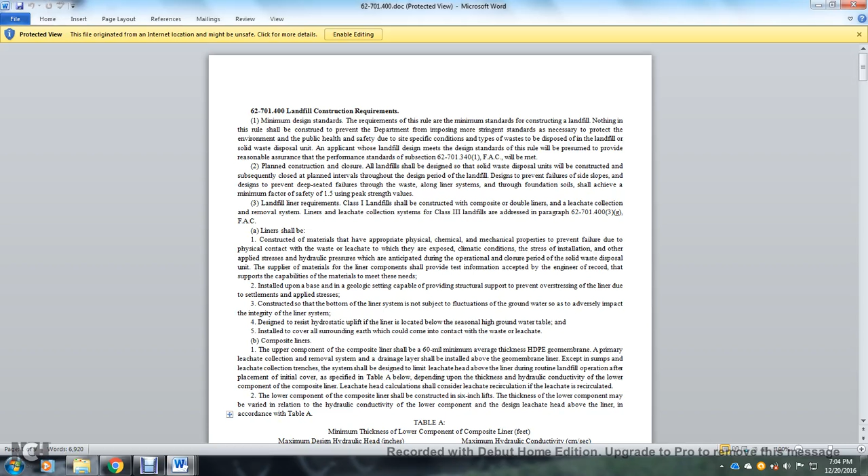Alright, 62701-400, landfill construction requirements.

Minimum design standards: the requirements of the rules are minimum standards for the construction of landfills. Nothing in the rules is construed to prevent the department from imposing more stringent standards necessary to protect the environment, public health, and safety due to specific conditions, the type of waste to be disposed of in the landfill, and the solid waste disposal unit application with the landfill design.

Meeting the design standard within the rule is presumed to provide reasonable assurance of meeting the performance standard of subsection 62-701.340(1), F.A.C., will be met.

The planned construction and closure of the landfill should be designed for the solid waste disposal unit, with construction and subsequent closure at planned intervals throughout the design period of the landfill.

The design must prevent failure of the side slope and prevent deep-seated failure through the waste, along with the liner system and the foundation soil, which shall achieve a minimum factor of safety of 1.5 using the peak strength.

Landfill liner requirements: Class 1 landfills should be constructed with a composite or double liner with a leachate collection and removal system. Liner and leachate collection system requirements for Class 3 landfills are addressed in paragraph 62-701.400(3)(g) of the Florida Administrative Code.

Liners shall be constructed of materials that have the appropriate physical, chemical, and mechanical properties to prevent failure due to physical contact with the waste, the leachate to which they are exposed, climatic conditions, and stress installation, along with applied stress and hydraulic pressure anticipated during the operational and closure period of the solid waste disposal unit.

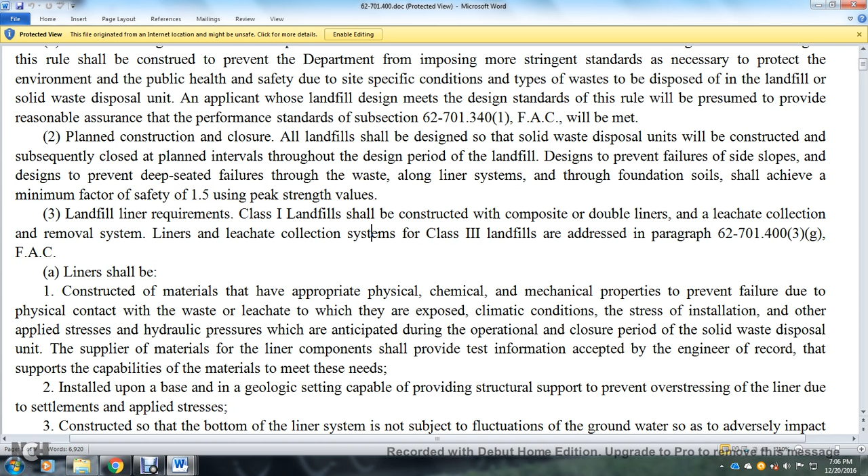The supplier of liner component materials shall provide test information accepted by the engineer of record to support the capability of the materials to meet the standards, and to install with the base in the geological setting the capability of providing structural support and preventing overstressing of the liner due to settlement and applied stress, constructed so that the bottom of the liner system is not subject to fluctuation with the groundwater so that it adversely impacts the integrity of the liner system.

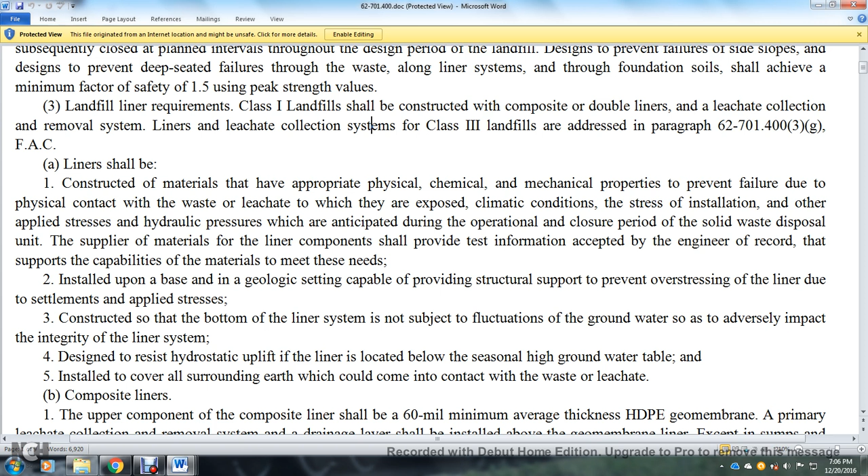Accounting for design hydrostatic uplift, the liner located below the seasonal high groundwater table shall be installed with cover over the surrounding area of earth which could come in contact with the waste or leachate. The upper component of the composite liner shall be a 60-mil minimum average thickness HDPE geomembrane.

The primary leachate collection and removal system drainage layer shall be installed above the geomembrane liner, except for sumps and leachate collection trenches. The system shall be designed to limit the leachate head above the liner during routine landfill operations, with placement of the initial cover as specified in Table A below.

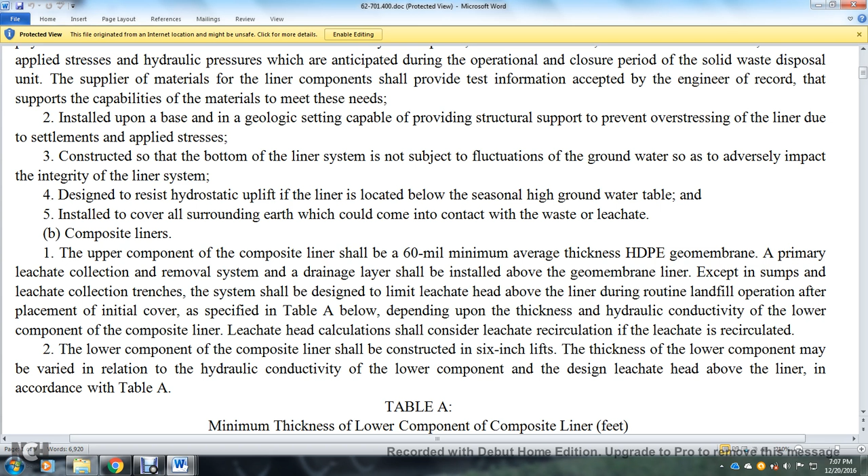Leachate recirculated through the lower component of the composite liner shall be constructed with a 6-inch lift. The thickness of the lower component may be varied in relation to the hydraulic conductivity of the lower component and the design leachate head above the liner, in accordance with Table A.

Table A: minimum thickness of the lower component of the composite liner in feet, maximum design hydraulic head in inches, and maximum hydraulic conductivity in centimeters per second.

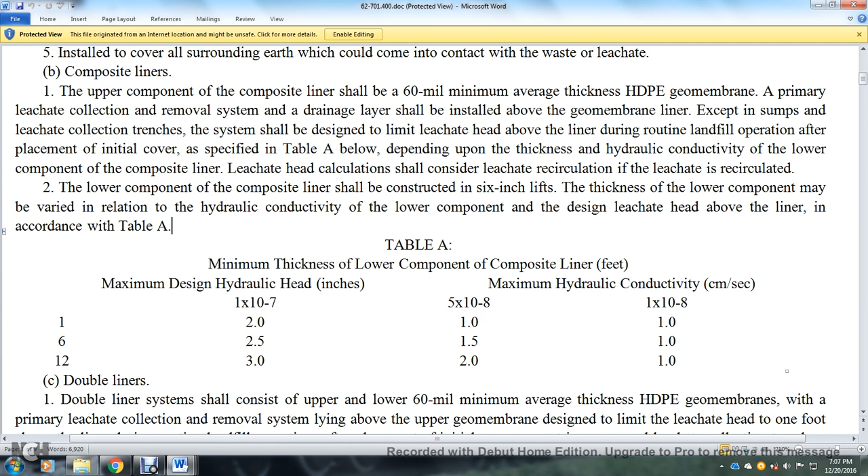The double liner system shall consist of an upper liner with a 60-mil minimum average thickness HDPE geomembrane, with a primary leachate collection and removal system above the upper geomembrane designed to limit the leachate head to one foot above the liner during routine landfill operation after placement.

Initial cover, except in the sumps, the leachate collection trench, and the leak detection secondary leachate collection system between the upper and lower liners. The lower geomembrane shall be placed directly on the subbase, with a minimum of 6 inches thick.

Free of sharp materials, any materials larger than 1/2 inch, with a saturated hydraulic conductivity less than or equal to 1 times 10 to the negative 5 centimeters per second.

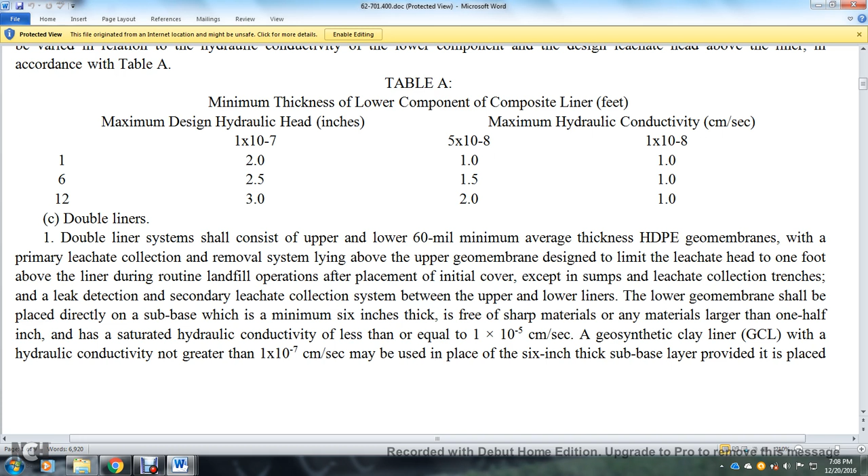A geosynthetic clay liner with a hydraulic conductivity no greater than 1 times 10 to the negative 7 centimeters per second may be used in place of the 6-inch thick subbase layer, provided that the prepared subgrade which will not damage the GCL.

The leak detection secondary leachate collection system shall have a minimum hydraulic conductivity of 10 centimeters per second, and is designed to limit the maximum hydraulic head on the lower liner to 1 inch.

They shall not allow the leach head to exceed the thickness of the drainage layer. The hydraulic conductivity of the leak detection secondary collection system material shall be derived from transmissivity and thickness measurements.

Standard geosynthetic components of the HDPE membranes and LLDPE membranes shall have factory and field seams with shear and peel strength, during conformance testing, as specified in method GRI GM19. PVC geomembranes shall have factory and field seams with shear and peel strength, during conformance testing, as specified in method PGI 1104.

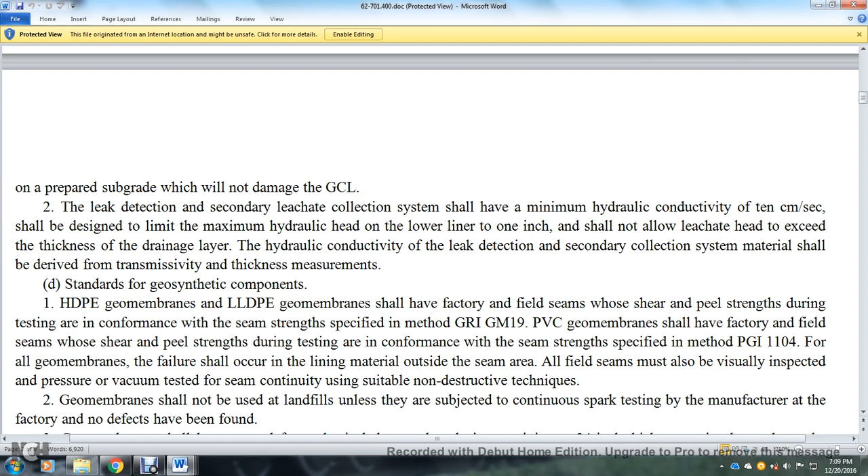For all geomembranes, failure should occur in the lining material outside of the seam area. All field seams must also be visually inspected, and pressure or vacuum tested for seam continuity using suitable non-destructive techniques.

The geomembrane shall not be used for the landfill unless it is subjected to continuous spark testing by the manufacturer at the factory, with no defects found.

Geomembranes should be protected from physical damage by placing a minimum of 24 inches of protective layer above. All materials in direct contact with the liner shall be free of sharp materials. Any material larger than 1/2 inch in the upper 12 inches of the protective layer shall be composed of soil or tire chips smaller than 4 square inches, non-protruding, with no wires that could pose a threat to the integrity of the liner.

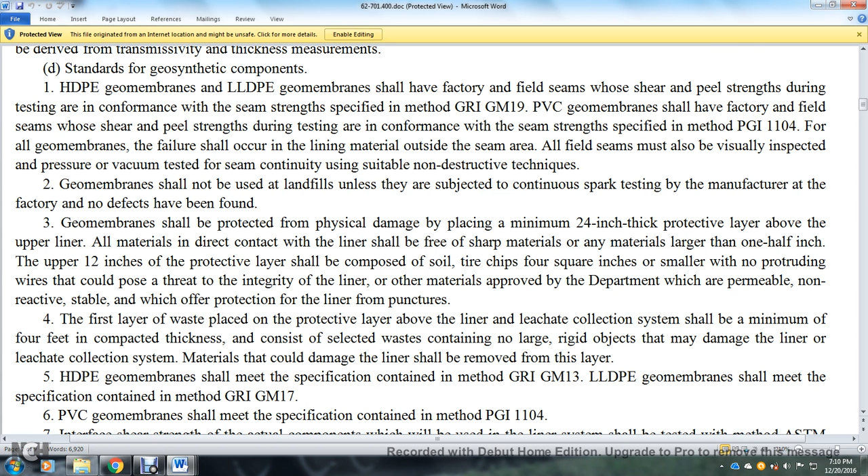Other materials approved by the department which are permeable, non-reactive may provide stable protection for the liner against puncture. The first layer of waste placed on the protective layer above the liner and leachate collection system shall be a minimum of 4 feet thick, consisting of select material containing no large rigid objects that could damage the liner, the leachate collection system, or related materials. Materials that could damage the liner shall be removed from this layer.

The HDPE geomembrane shall meet specifications contained in method GRI GM13. The LLDPE geomembrane shall meet specifications contained in method GRI GM17. The PVC geomembrane shall meet specifications contained in method PGI 1104.

Interface shear strength for the actual components used in the liner system shall be tested according to method ASTM D5321, hereby adopted and incorporated by reference, as an equivalent test method to obtain the standard consistent with subsection 62701.210.14 F.A.C. However, when testing GCLs, the method ASTM D6243 shall be used.

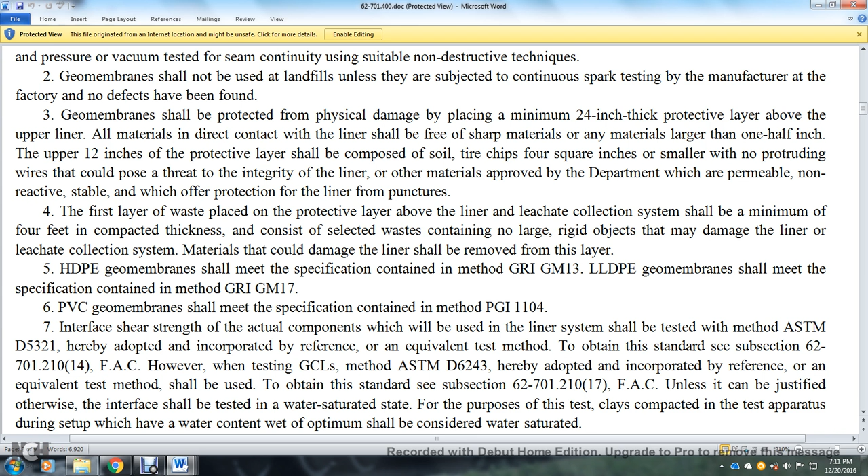The method is adopted and incorporated by reference as an equivalent test method to obtain the standard consistent with subsection 62701.210.17 F.A.C. Unless justified otherwise, the interface shall be tested in a water saturated state. For purposes of this test, clay compacted in the test apparatus during setup which has water content wet of optimum shall be considered water saturated.

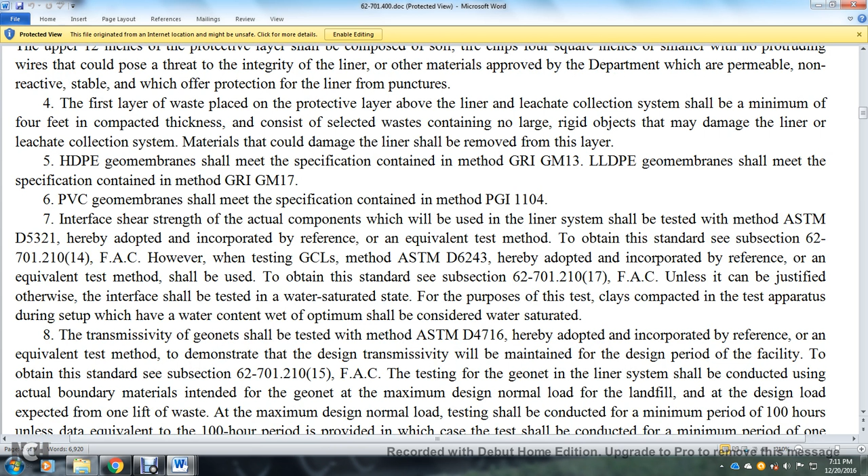The transmissivity of the GeoNet shall be tested using method ASTM D4716, hereby adopted and incorporated by reference, as an equivalent test method to demonstrate that the design transmissivity will be maintained for the design period of the facility, consistent with standard subsection 62701.210.15 F.A.C.

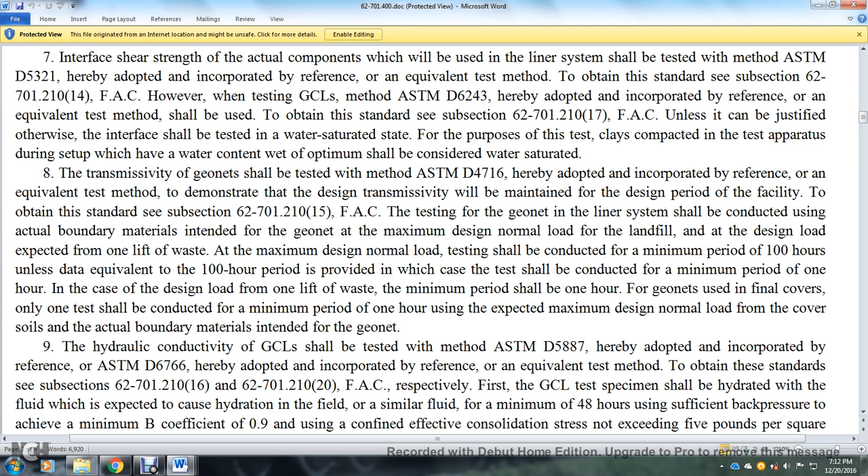The hydraulic conductivity of the GCLs should be tested using method ASTM D5887, hereby adopted and incorporated by reference, or ASTM D6766, also hereby adopted and incorporated by reference, as equivalent test methods to obtain the standard consistent with subsections 62701.210.16 and 62701.210.20 F.A.C., respectively.

First, the GCL testing specimen shall be hydrated with the fluid expected to cause hydration, or a field similar fluid, for a minimum of 48 hours, with sufficient back pressure to achieve a minimum B coefficient of 0.9, under a confined effective consolidation stress not exceeding 5 pounds per square inch.

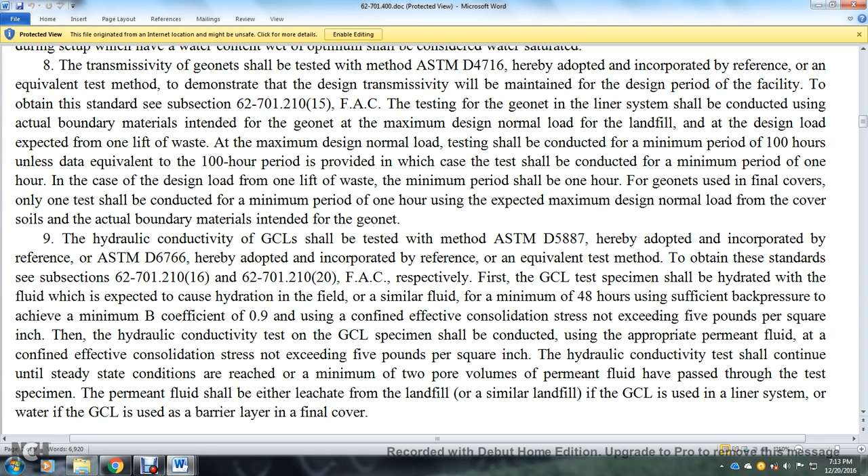If not submitted as part of the permit application, the department requires the testing in subparagraphs (3)(d)7., 8, and 9 of this section for materials used in liner construction to be conducted as part of the construction quality assurance activity. The results of these tests shall be included in the construction documentation required under subsection (7). The single point testing required under subparagraphs (3)(d)7., 8, and 9 is required as part of the permit application phase prior to liner construction, to confirm that the components selected meet the design criteria for the permitted application.

The following specifications shall be provided with the geosynthetic components: qualifications for the designer, manufacturer, installer, geosynthetic quality assurance consultant, and geosynthetic quality assurance laboratory quality assurance program; and material specifications for geomembranes, geotextiles, geogrids, geocomposites, and geonets, including general requirements specifying geomembrane properties and labeling.

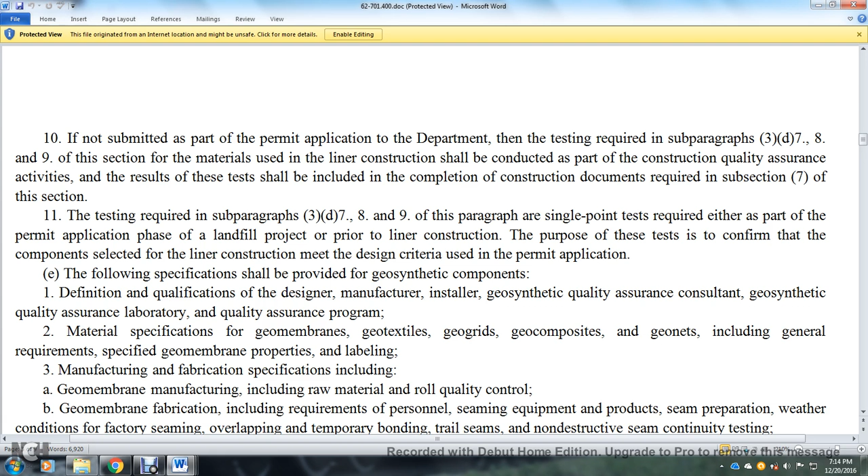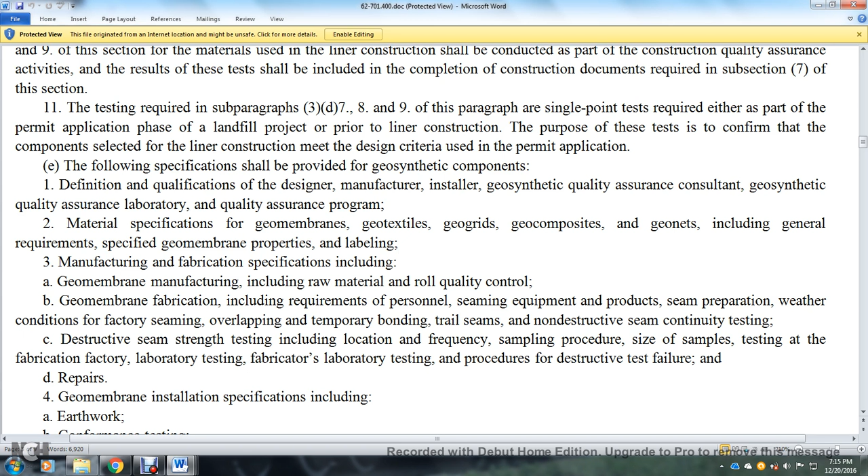Manufacturing and fabrication specifications include geomembrane manufacturing, raw material and roll quality control, and geomembrane fabrication requirements for personnel, seaming equipment, and product. This covers seam preparation, weather conditions for factory seaming, overlapping, temporary bonding, trial seams, non-destructive seam continuity testing, destructive seam strength testing including location, frequency, sampling procedure, and sample size.

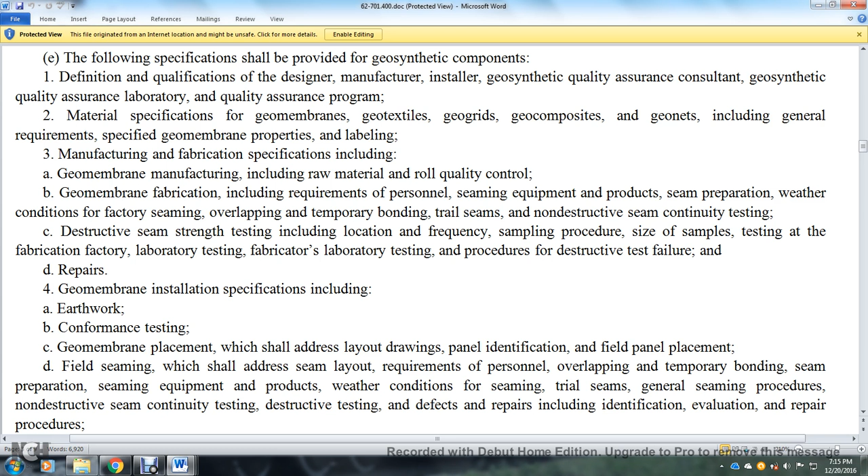Testing at the fabrication factory and laboratory testing procedures for destructive test failure and repairs are also specified. Geomembrane installation specifications include earthwork and conformance testing, geomembrane placement addressing layout drawings, panel identification, field panel placement, and field seaming. This addresses seam layout, personnel requirements, overlapping, temporary bonding, seam preparation, seaming equipment, product and weather conditions, trial seams, general seam procedures, non-destructive seam continuity testing, destructive testing, and defect repair including identification, evaluation, and repair procedures.

Materials in contact with the geomembrane include granular materials, concrete, and sumps and appurtenances. The geotextile and geogrid specifications include handling and placement, conformance testing, seaming, overlapping, and repair, as well as placement of soil materials and any overlying materials.

Geonet and geocomposite specifications include handling and placement, conformance testing, stacking, joining, and preparation and placement of soil materials and overlying materials. GCL specifications include handling and placement, conformance testing, seams, overlaps, repairs, and placement with soil materials and any other overlying materials. Standards for soil liner components follow.

Soil components of the liner should be constructed to the greatest extent practical free of lenses, cracks, channels, root holes, pipes, and other structural inconsistencies that increase the saturated hydraulic conductivity of the soil component. The design shall illustrate and describe instances where over-excavation of permeable areas and backfilling may be necessary to seal the permeable area.

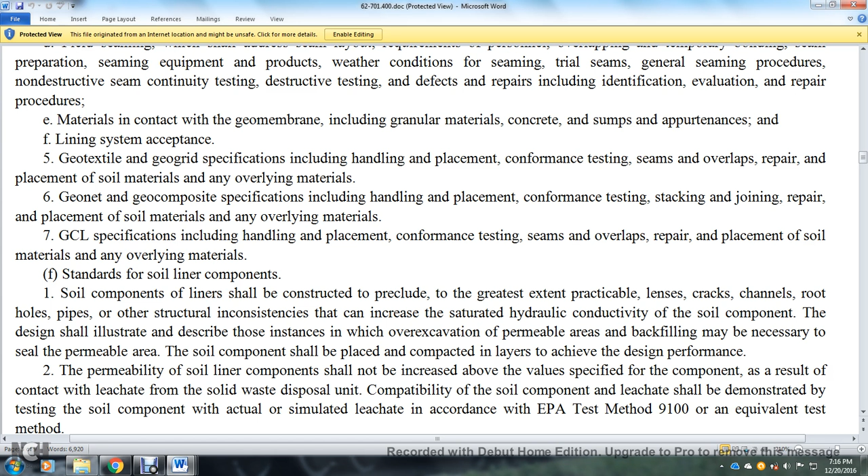The soil component shall be placed as a compacted liner to achieve the design performance. The permeability of the soil liner component shall not increase above the specified value when exposed to leachate from the solid waste disposal unit. Compatibility of the soil component with the leachate shall be demonstrated by testing the soil component with actual or simulated leachate, in accordance with EPA test method 9100 or an equivalent test method.

The soil component of the liner may consist of in-situ soils, provided they meet specifications for soil liner testing. Testing of in-situ soils should be performed in accordance with site specifications and construction quality assurance planning, in accordance with subsections 62-701.400(7) and (8), Florida Administrative Code.

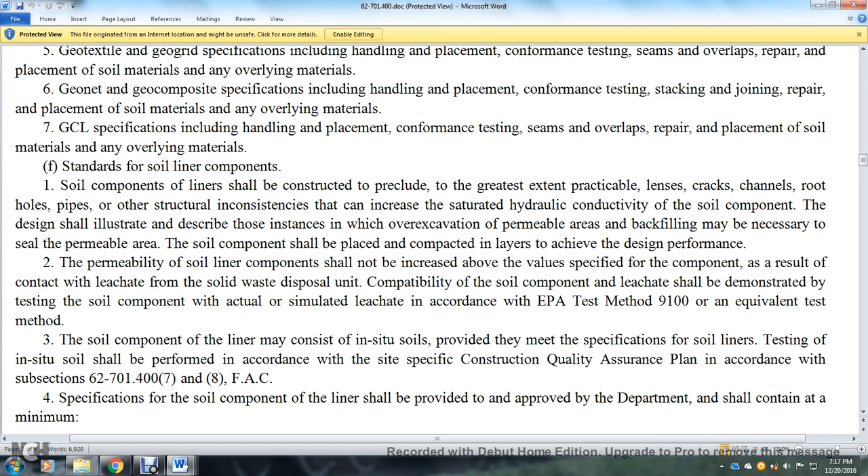Specifications for the soil component of the liner shall be approved by the department and shall contain, at a minimum: allowable range for particle size distribution, Atterberg limits to include shrinkage limit, placement moisture criteria, dry density criteria, maximum laboratory-determined saturated hydraulic conductivity using simulated leachate or saturating testing liquid, minimum thickness of soil liner, lift thickness, surface preparation, scarification for tying lifts together, and minimum percentage of clay minerals in the soil component.

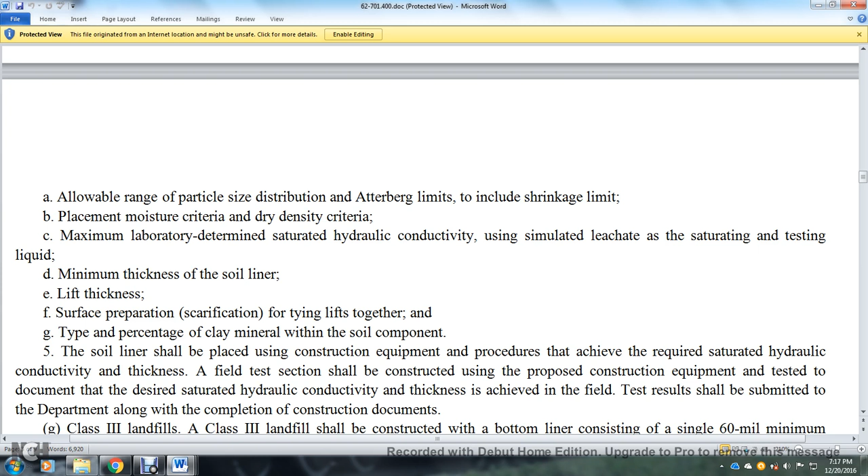Soil liner should be placed using the construction equipment and procedure for achieving the required saturated hydraulic conductivity and thickness. A field test section shall be constructed using the proposed construction equipment and tested. The documentation that the desired saturated hydraulic conductivity and thickness is achieved with the field test results shall be submitted to the department along with the completion of construction documentation.

Class 3 landfills. A Class 3 landfill should be constructed with a bottom liner consisting of a single 60 mil minimum average thickness HDPE geomembrane. In sumps located inside a landfill footprint and leachate collection trenches, the geomembrane shall be placed on a GCL with a hydraulic conductivity less than or equal to 1 times 10 to the negative 7 centimeters per second, or on a compacted clay liner of a minimum of 6 inches with a saturated hydraulic conductivity less than or equal to 1 times 10 to the negative 7 centimeters per second.

The liner shall be placed on a prepared subgrade so as not to damage the geomembrane liner or the GCL, with a primary leachate collection and removal system. A drainage layer shall be installed above the geomembrane liner except for the sump and the leachate collection trenches. The system shall be designed to limit leachate head over the liner during routine landfill operation, after placement of initial cover, to no greater than 12 inches. An applicant may request exemption from the requirements of this paragraph in accordance with paragraph 62-701.340(2)(b) of the Florida Administrative Code.

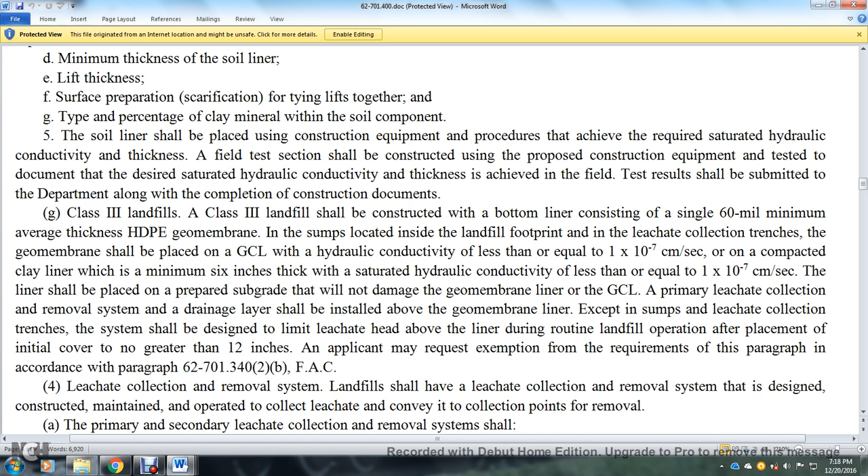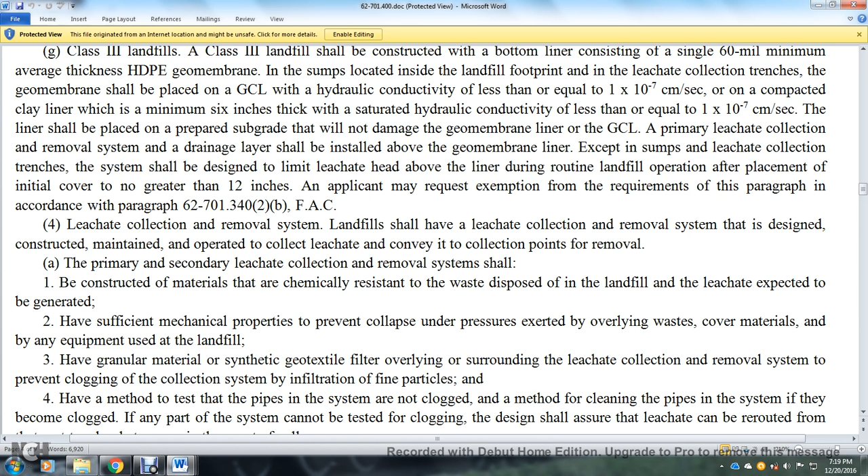Leachate collection and removal system. The landfill shall have a leachate collection and removal system that is designed, constructed, maintained and operated to collect leachate, conveying it to collection points for removal. The primary and secondary leachate collection and removal systems shall be constructed of materials that are chemically resistant to the waste disposed of in the landfill and the leachate expected to be generated, having sufficient mechanical strength to prevent collapse under the pressure exerted by the overlying waste, the cover materials, and any equipment used in the landfill.

Granular material or a synthetic geotextile filter overlying or surrounding the leachate collection and removal system, preventing clogging of the collection system by infiltration of fine particles. And a method of testing that the pipes of the system are not clogged, and a method of cleaning the pipes in the system if they become clogged. If any part of the system cannot be tested for clogging, the design shall assure that the leachate can be rerouted from that part to the leachate sump in the event of a collapse.

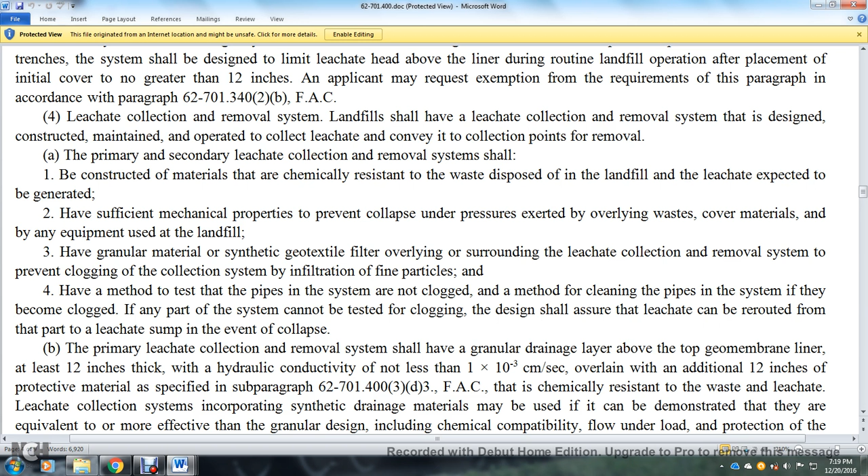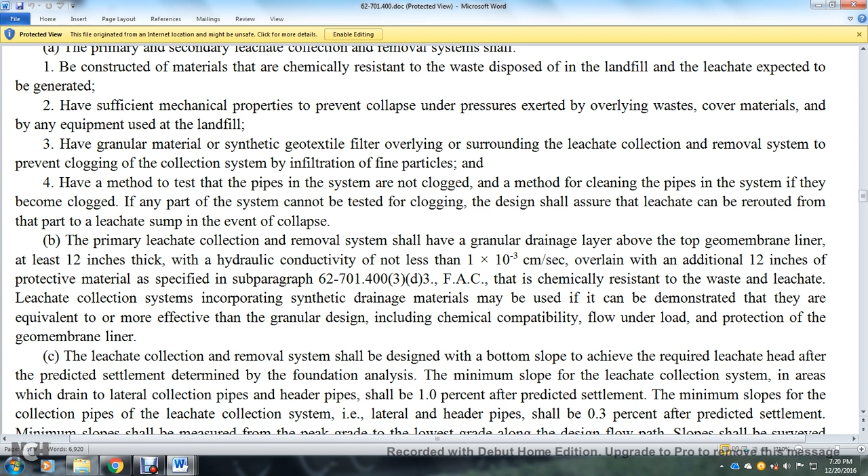The primary leachate collection and removal system shall have a granular drain layer above the top of the geomembrane liner at least 12 inches thick, with a hydraulic conductivity of not less than 1 times 10 to the negative 3 centimeters per second, overlain by an additional 12 inches of the protective material specified in subparagraph 62-701.400(3)(d)3., Florida Administrative Code, chemically resistant to the waste and leachate. Collection systems incorporating synthetic drainage materials may be used if it can be demonstrated that they are equivalent to or more effective than the granular design, including chemical compatibility, flow under load, and protection of the geomembrane liner.

The leachate collection and removal system shall be designed with bottom slopes to achieve the required leachate head after projected settlement, determined by the foundation analysis. The minimum slope of the leachate collection system in the areas draining to the lateral collection pipes and header pipes should be 1% after projected settlement. The minimum slopes for the collection pipes of the leachate collection system, the lateral and header pipes, shall be 0.3% after projected settlement, with the minimum slope measured from the peak grade to the lowest grade along the design flow path.

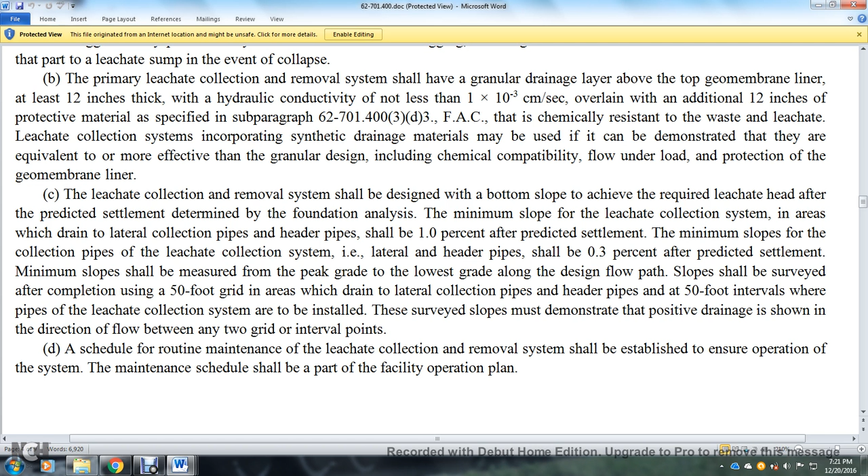Slopes shall be surveyed after completion using a 50-foot grid in the drainage areas, and along the lateral collection pipes and header pipes at 50-foot intervals where the pipes of the leachate collection system are to be installed. The surveyed slopes must demonstrate positive drainage in the direction of flow between any two grid interval points. A scheduled routine maintenance of the leachate collection and removal system shall be established to ensure operation of the system. The maintenance schedule should be part of the facility operation. Leachate recirculation.

Leachate shall be recirculated only in solid waste disposal units with the leachate recirculation system included in the operational plan, constructed and operated in a manner consistent with the system. If leachate is recirculated after closure, the operation plan shall be included as part of the approved closure plan. Leachate recirculation shall include estimated impacts on the head of leachate over the liner, subsidence of the waste and gas production, and shall meet the following requirements unless otherwise approved in the operational plan.

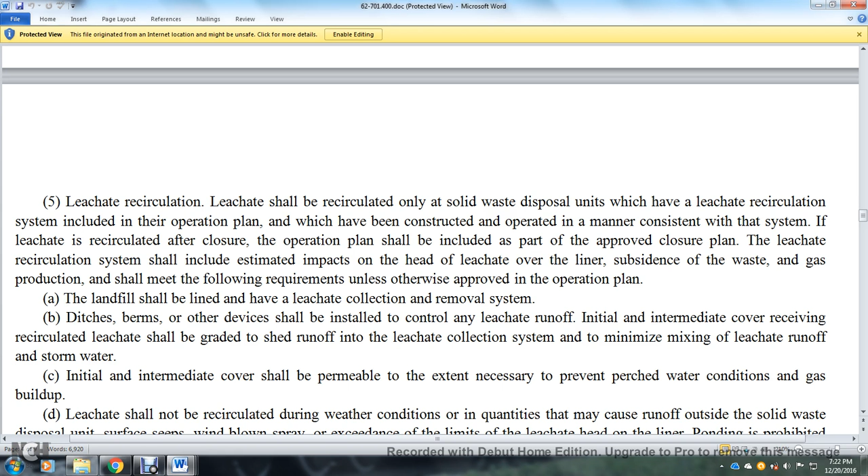Landfills shall be lined and have a leachate collection and removal system. Ditches, berms, and other devices shall be installed to control any leachate runoff. Initial and intermediate cover receiving recirculated leachate should be graded to direct runoff into the leachate collection system to minimize the mixing of leachate runoff with stormwater. Initial and intermediate cover shall be permeable to the extent necessary to prevent perched water conditions and gas buildup.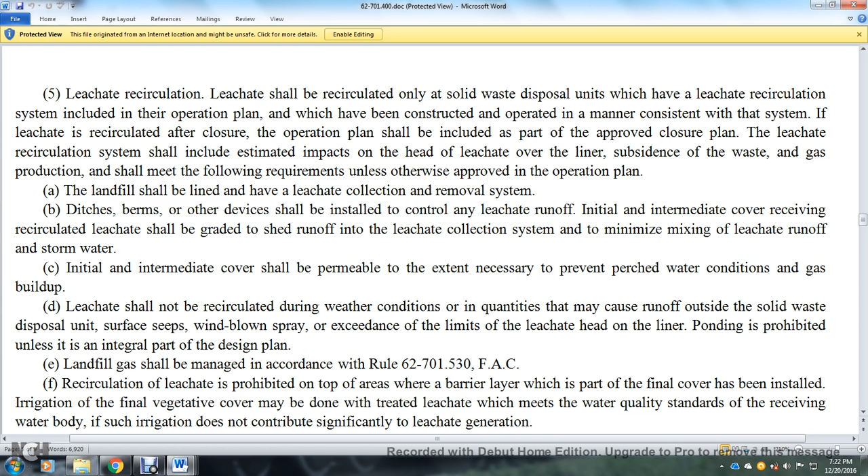Leachate should not be recirculated during weather conditions or in quantities that may cause runoff outside of solid waste disposal units. Surface seeps, wind-blown spray, exceedance of the limits of leachate head on the liner, and ponding are prohibited unless an integral part of the design plan. E. Landfill gas shall be managed in accordance with Rule 62-701.530, Florida Administrative Code.

Recirculation of leachate is prohibited on top of the barrier layer which is part of the final cover that has been installed. Irrigation of the final vegetative cover may be done with treated leachate which meets the water quality standards of the receiving water body, if such irrigation does not contribute to significant leachate generation. Leachate storage tanks and leachate surface impoundments: the requirements of this subsection apply to leachate storage tanks and leachate surface impoundments constructed.

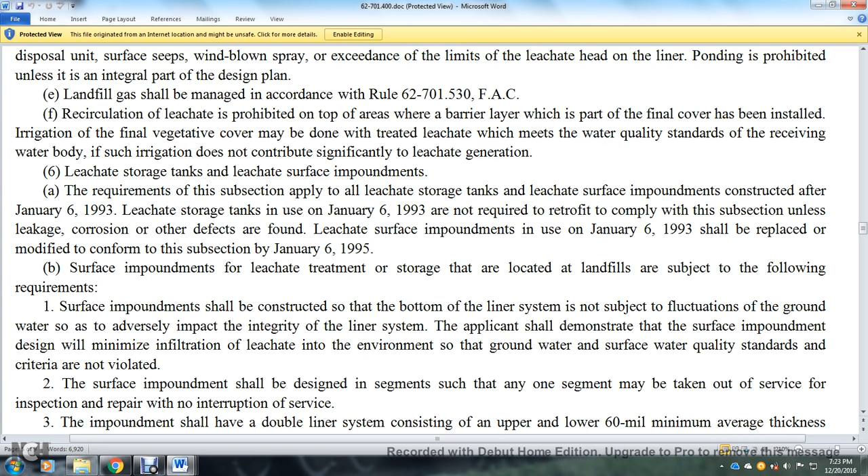After January 6, 1993, leachate storage tanks in use on January 6, 1993 are not required to be retrofitted to comply with this subsection unless leakage, corrosion, or other defects are found. Leachate surface impoundments in use on January 6, 1993 shall be replaced or modified to conform with this subsection by January 6, 1995. Surface impoundments for leachate treatment or storage that are located at landfills are subject to the following requirements. Surface impoundments must be constructed with the bottom of the liner system above fluctuations of the groundwater so as not to adversely impact the integrity of the liner.

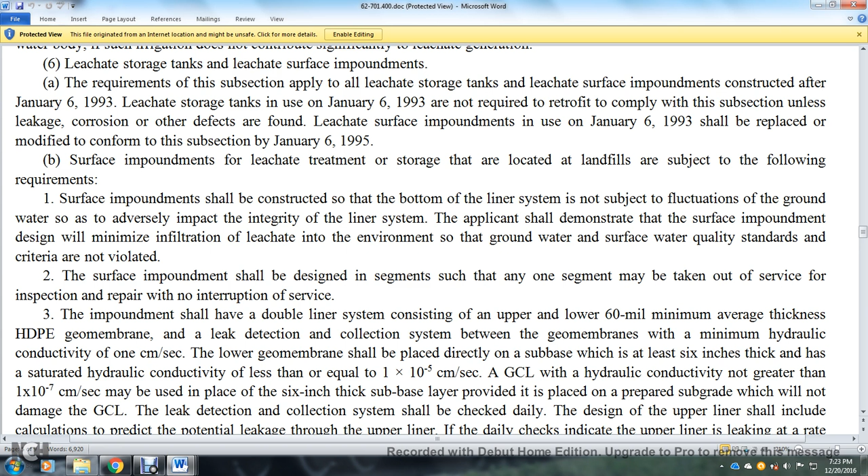The applicant shall demonstrate that the surface impoundment is designed to minimize infiltration of leachate into the environment so that groundwater and surface water quality standards and criteria are not violated. The surface impoundment shall be designed in segments so that any segment may be taken out of service for inspection and repair with no interruption of service.

The impoundment shall have a double liner system consisting of upper and lower 60 mil minimum average thickness HDPE geomembranes with a leak detection and collection system between the geomembranes, with a minimum hydraulic conductivity of 1 centimeter per second. The lower geomembrane should be placed directly on a subbase at least 6 inches thick that has a saturated hydraulic conductivity less than or equal to 1 times 10 to the negative 5th centimeters per second. A GCL with a hydraulic conductivity not greater than 1 times 10 to the negative 7th centimeters per second may be used in place of the 6-inch thick subbase layer, provided the prepared subgrade will not damage the GCL.

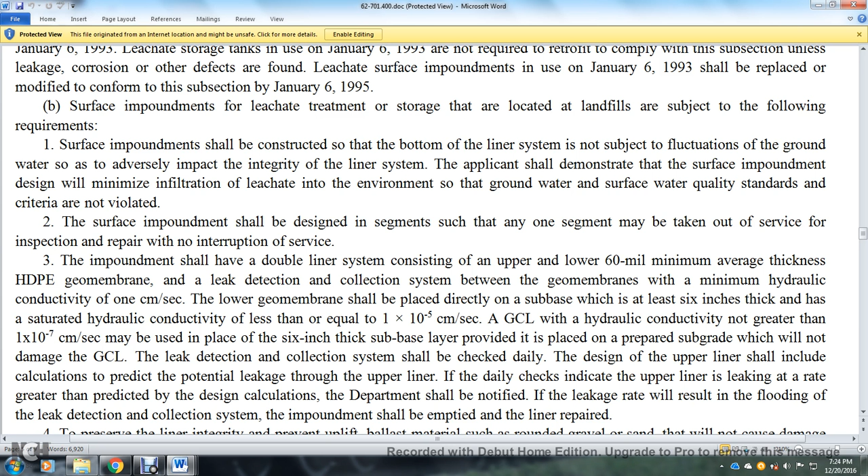The leak detection and collection system shall be checked daily. Design of the upper liner shall include a calculation to predict the potential leakage through the upper liner. If checks indicate the upper liner is leaking at a rate greater than predicted by the design calculation, the department shall be notified. If the leakage rate will result in flooding of the leak detection and collection system, the impoundment shall be emptied and the liner repaired.

4. To preserve liner integrity and prevent uplift, ballast material such as rounded gravel or sand that will not damage the geomembrane liner shall be placed on top of the liner which is located below the water table. A minimum of 2 feet of freeboard above the depth which could occur in the event of a 25-year, 24-hour storm shall be maintained. At leachate surface impoundments, vectors and off-site odors shall be controlled.

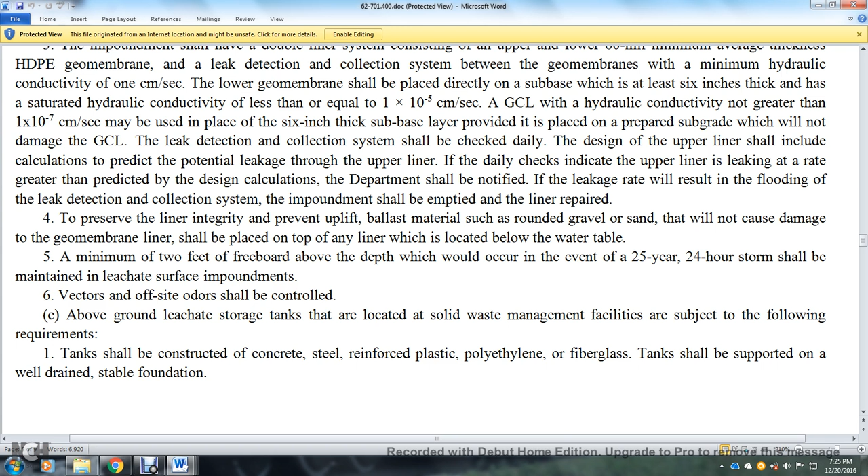Above ground leachate storage tanks that are located at solid waste management facilities are subject to the following requirements. Tanks shall be constructed of concrete, steel, reinforced plastic, polyethylene, or fiberglass. Tanks shall be supported on a well-drained, stable foundation.

The bottom of the steel tank at rest on the earthen material should have cathodic protection with either sacrificial anodes or an impressed current system, which is designed, fabricated and installed in accordance with the engineering plan submitted to the Department.

The exterior surface of all steel storage tanks shall be protected with a primer coat, bond coat, and 2 or more final coats of paint, or other surface coating systems designed to prevent corrosion and deterioration. The interior of all tanks must be lined with a material resistant to the liquid being stored.

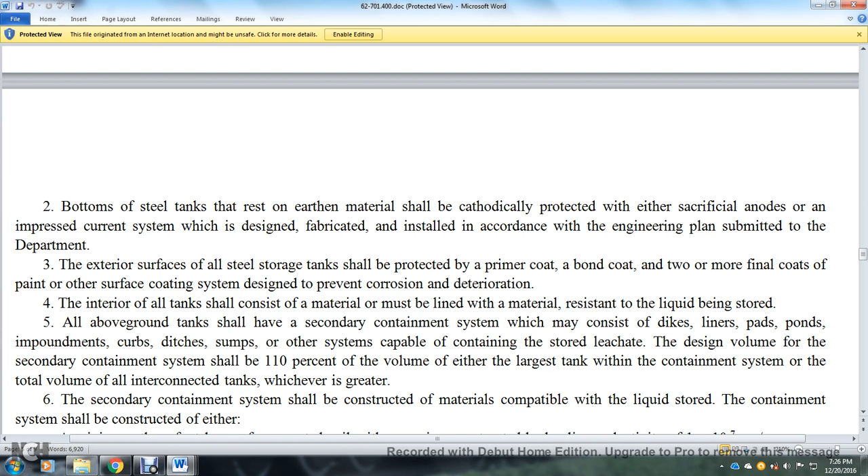All above-ground tanks shall have a secondary containment system, which may consist of dikes, liners, pads, ponds, impoundments, curbs, ditches, sumps, or other systems capable of containing the stored leachate. The design volume for the secondary containment system shall be 110% of the volume of either the largest tank within the containment system or the total volume of the interconnected tanks, whichever is greater.

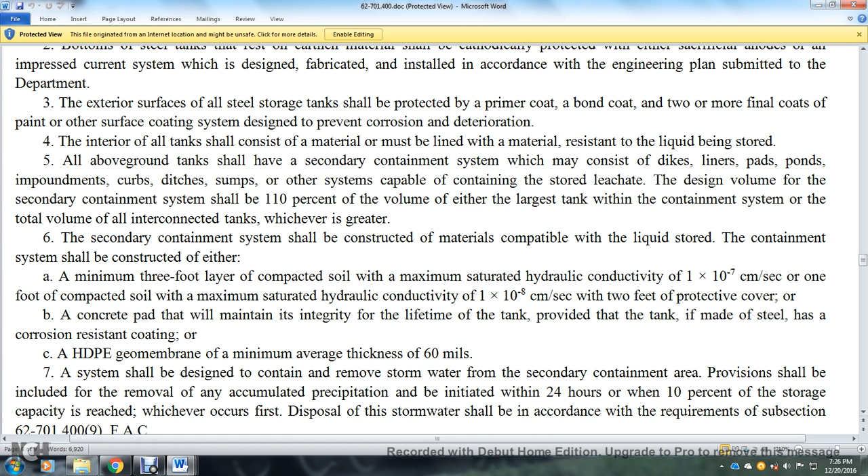The secondary containment system shall be constructed with materials compatible with the liquid stored. The containment system shall be constructed of either a minimum 3-foot layer of compacted soil with a maximum saturated hydraulic conductivity of 1 times 10 to the negative 7th centimeters a second; 1 foot of compacted soil with a maximum saturated hydraulic conductivity of 1 times 10 to the negative 8 centimeters a second, with a protective cover or concrete pad that maintains integrity for the lifetime of the tank, provided that the tank, if made of steel, has a corrosion resistant coating; or an HDPE geomembrane with a minimum average thickness of 60 mils.

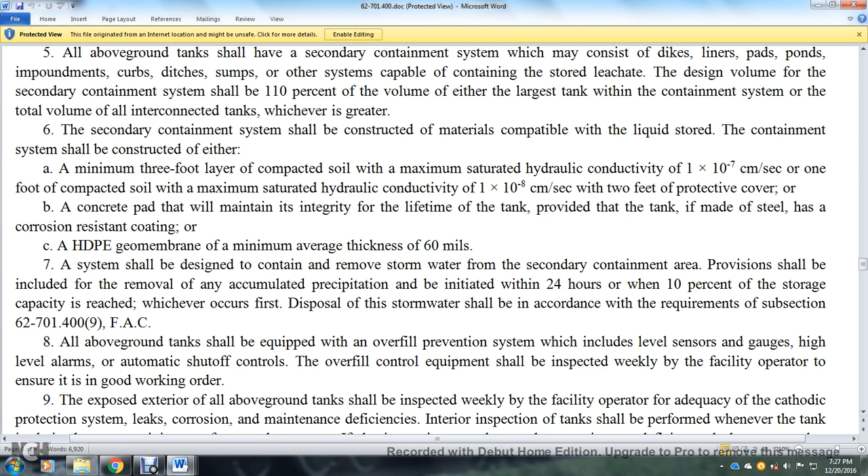The system shall be designed to contain and remove stormwater from the secondary containment area. Provision shall be included for removal of accumulated precipitation, initiated within 24 hours or when 10% of the storage capacity is reached, whichever occurs first. Disposal of the stormwater shall be in accordance with the requirements of subsection 62-701.400(9), Florida Administrative Code.

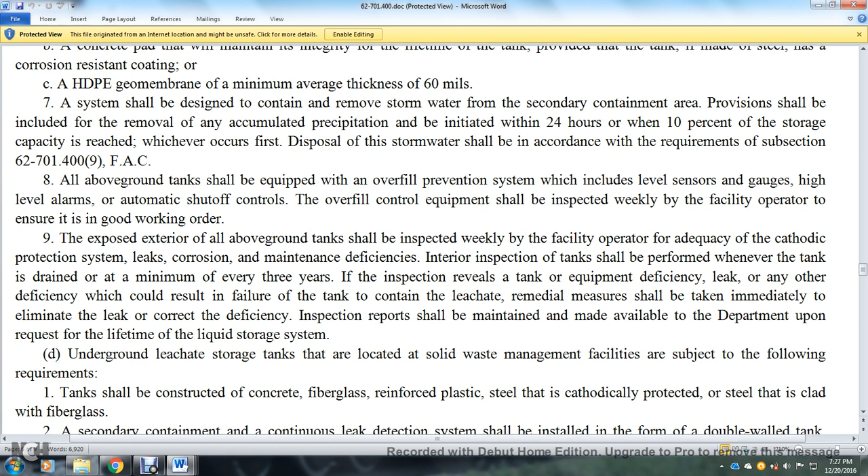All above-ground tanks should be equipped with overfill prevention. The system would include level sensors, gauges, high-level alarms, and automatic shut-off controls. The overfill control equipment shall be inspected weekly by the facility operator to ensure it is in good working order.

The exposed exterior of all above-ground tanks should be inspected weekly by the facility operator for adequacy of the cathodic protection, leaks, corrosion, and maintenance deficiencies. Interior inspections of the tank shall be performed whenever the tank is drained, at a minimum every 3 years. If the inspection reveals a tank or equipment deficiency, leak, or any other deficiency that could cause a release or result in failure of the tank to contain the leachate, remedial measures shall be taken immediately to eliminate the leak or correct the deficiency.

Inspection reports shall be made available to the department upon request for the lifetime of the liquid storage system. Underground leachate storage tanks located at solid waste management facilities are subject to the following requirements. Tanks should be constructed of concrete, fiberglass reinforced plastic, steel with cathodic protection, or steel clad with fiberglass.

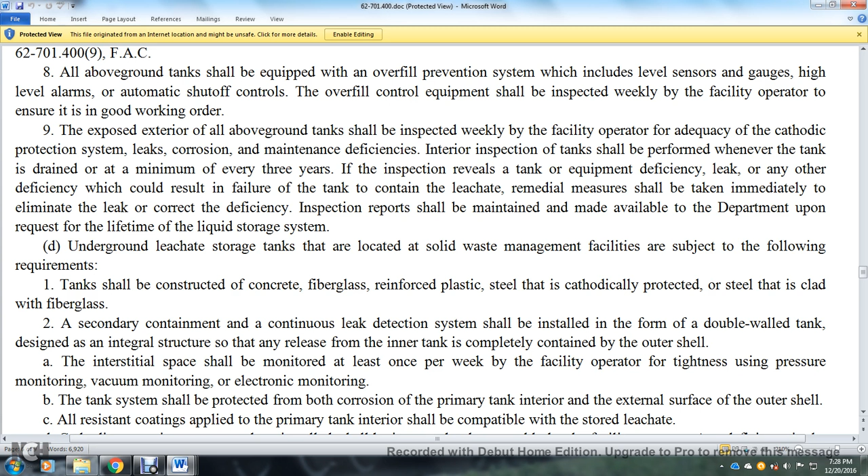Secondary containment with a continuous leak detection system shall be installed in the form of a double-walled tank, designed as an integral structure, so that any release from the tank is completely contained by the outer shell. The interstitial space shall be monitored at least once per week by the facility operator for tightness using pressure monitoring, vacuum monitoring, or electronic monitoring.

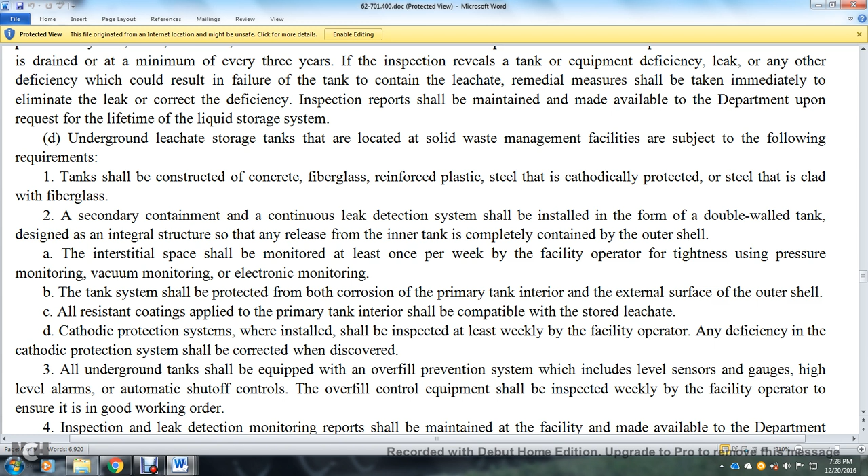The tank shall be protected from corrosion on both the primary tank interior and external surface of the outer shell. Any resistant coating applied to the primary tank interior shall be compatible with the stored leachate. Cathodic protection systems, where installed, shall be inspected weekly by the facility operator. Any deficiency in the cathodic protection system shall be corrected when discovered.

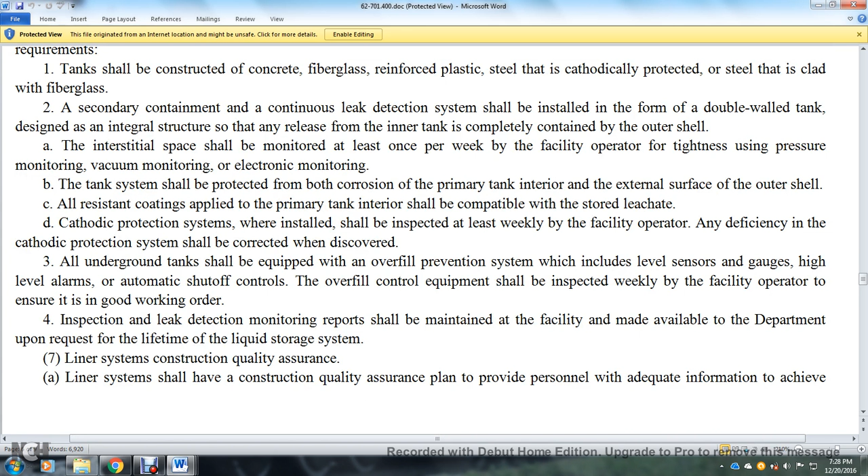All underground tanks shall be equipped with an overfill prevention system, which includes level sensors, gauges, high-level alarms, and automatic shut-off controls. The overfill control equipment shall be inspected weekly by the facility operator to ensure good working order.

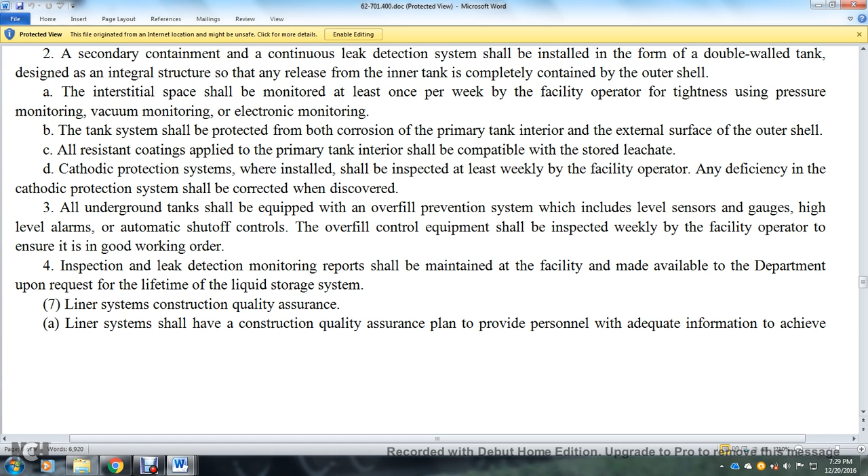Inspection and leak detection monitoring reports shall be maintained at the facility and made available to the department upon request for the lifetime of the liquid storage system. Liner systems construction quality assurance: the liner system shall have a construction quality assurance plan to provide the personnel with adequate information to achieve.

Continuous compliance with the liner construction requirements. The plan shall include or refer to specifications and construction methods, using established engineering practices to construct liners, and provide quality control testing procedures. Sample frequency and sample testing shall be conducted in the field by trained personnel during the construction.

After construction completion, such personnel will be under the direction of the construction quality assurance professional engineer to ensure the liner system complies with these standards. The construction quality assurance professional engineer or designee shall be on the site at all times during construction to monitor the construction activity, and shall be on site monitoring the offloading of the geosynthetics to be used in the liner system.

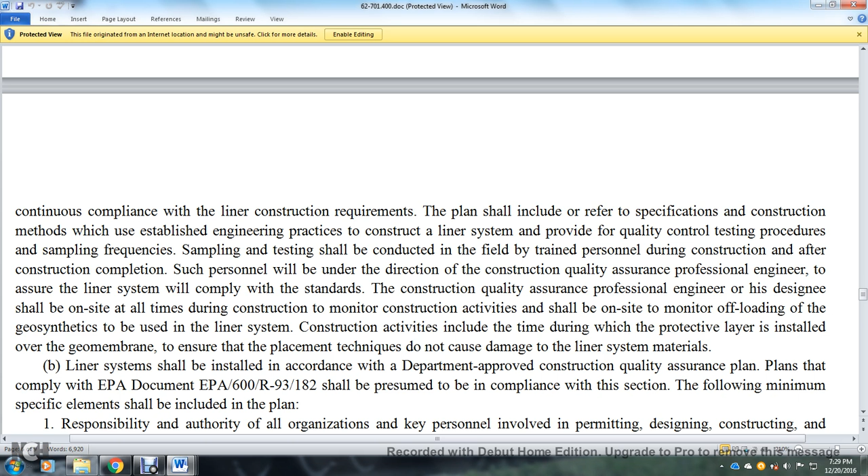The construction activity shall include the time during which the protective layer is installed over the geomembrane, to ensure the placement technique does not cause damage to the liner system's materials. The liner system shall be installed in accordance with the department-approved construction quality assurance plan. A plan complying with the EPA document EPA/600/R-93/182 shall be presumed to comply with this section.

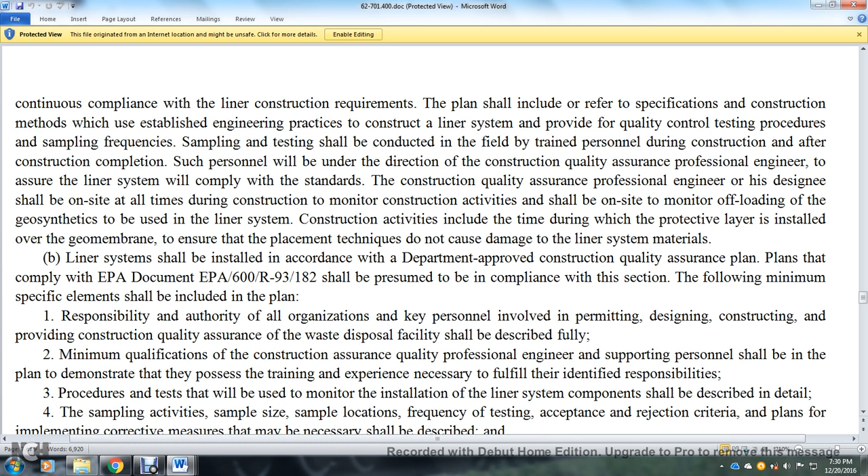The following minimum specific elements shall be included within this plan. The responsibility and authority of all the organizations and key personnel involved with the permitting, design, construction, and construction quality assurance of the waste disposal facility shall be described in full. Minimum qualifications of the construction quality assurance professional engineer and supporting personnel shall be in the plan to demonstrate that they possess the training and experience necessary to fulfill their identified responsibilities.

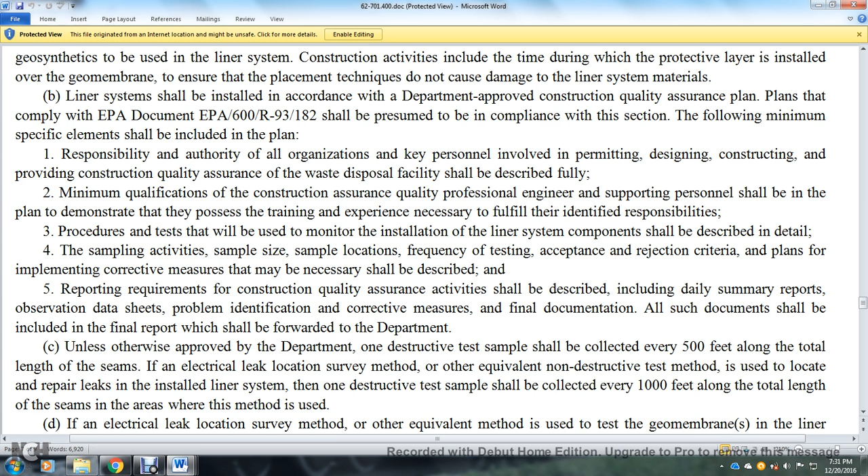3. Procedures and tests that will be used in monitoring the installation of the liner system components shall be described in detail. The sampling activity, sample size, sample location, frequency of testing, acceptance and rejection criteria, plans for implementing corrective measures that may be necessary shall be described. Reporting requirements and construction quality assurance activities shall be described, including daily summaries, reports, observation data sheets, problem identification, corrective measures, and final documentation. All such documentation shall be included in the final report, which shall be forwarded to the department.

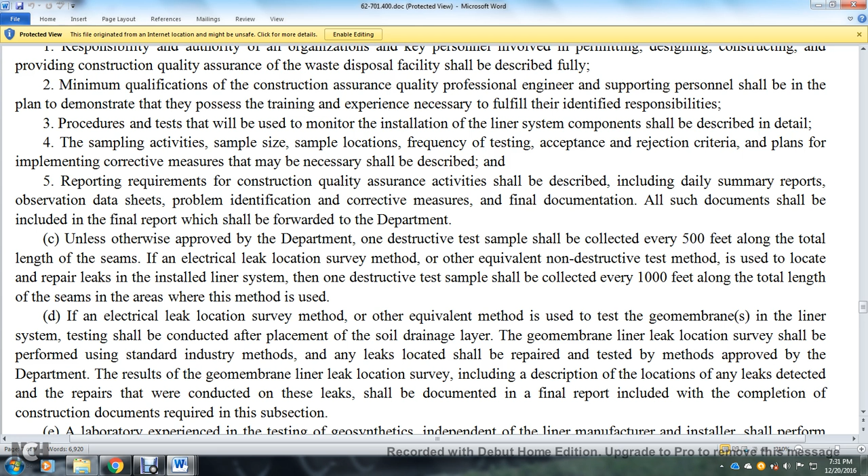Unless otherwise approved by the department, one destructive test sample shall be collected every 500 feet along the total length of the seams. An electrical leak location survey method, or equivalent non-destructive test method, is used to locate and repair leaks in the installed liner system. One destructive test sample should be collected every 1,000 feet along the total length of the seams in the area where this method is used.

If an electrical leak location survey method or other equivalent method is used to test the geomembrane in the liner system, testing should be conducted after the placement of the soil drainage layer. The geomembrane liner leak location survey shall be performed using standard industry methods. Any leak located shall be repaired. The test methods are approved by the department.

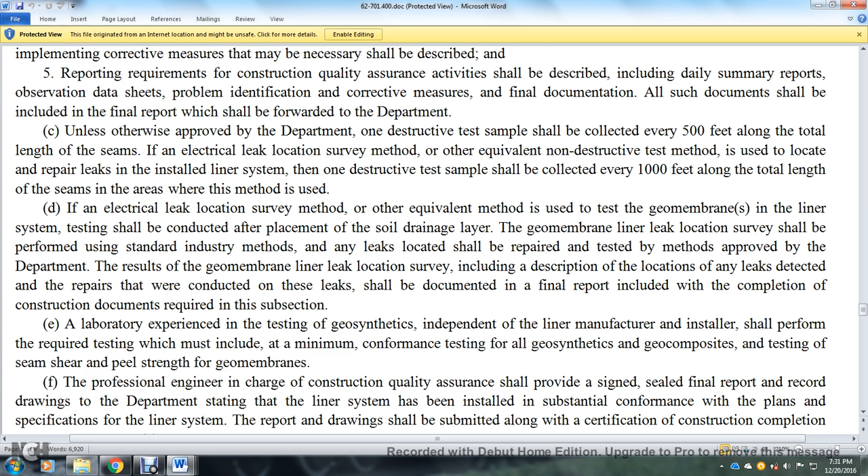The results of the geomembrane liner leak location survey, including the description and location of any leaks detected and the repairs conducted, shall be documented in the final report, including the completion of the construction documentation required in the subsection. A laboratory experienced in testing geosynthetics and independent of the liner manufacturer and installer shall perform the required testing, which must include, at a minimum, conformance testing of all geosynthetics and geocomposites, and testing of the seam shear and peel strength of geomembranes.

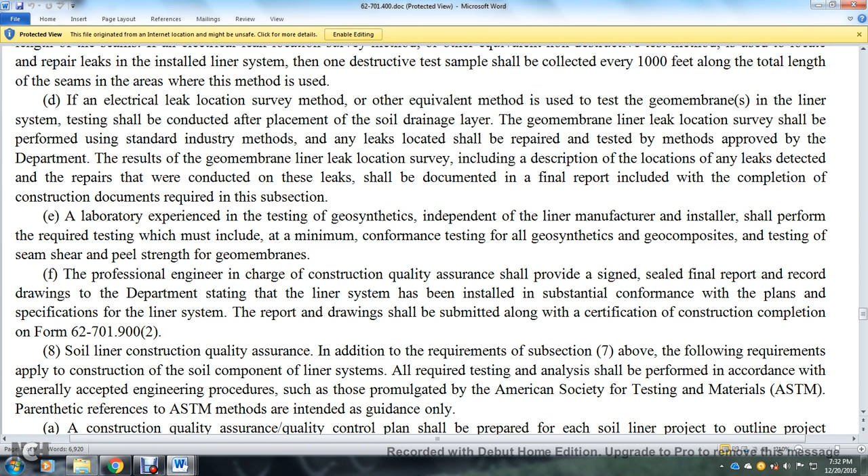The professional engineer in charge of construction quality assurance shall provide a signed and sealed final report and record drawings to the department stating the liner system has been installed in substantial conformance with the plans and specifications for the liner system. The report and drawings shall be submitted along with the certification of construction completion, form 62-701.900(2).

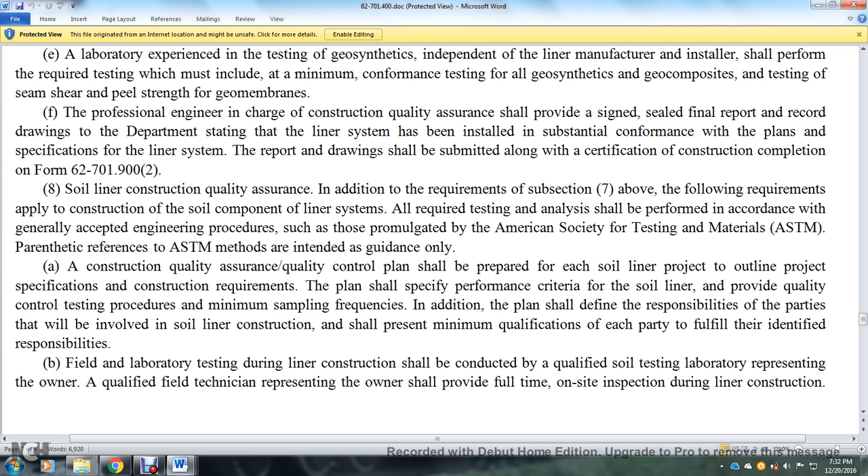8. Soil liners, construction, and quality assurance. In addition to the requirements of subsection (7) above, these requirements apply to the construction of the soil components of the liner system. All required testing and analysis shall be performed in accordance with generally accepted engineering procedures, such as those promulgated by the American Society for Testing and Materials (ASTM). Parenthetical references to the ASTM methods are intended as guidance.

Construction quality assurance and quality control plans shall be prepared for each soil liner project to outline the project specifications and construction requirements. The plan shall specify the performance criteria for the soil liner and provide quality control test procedures and minimum sampling frequency. In addition, the plan shall define responsibilities for the parties that will be involved with the soil liner construction and shall present the minimum qualifications for each party to fulfill their identified responsibilities.

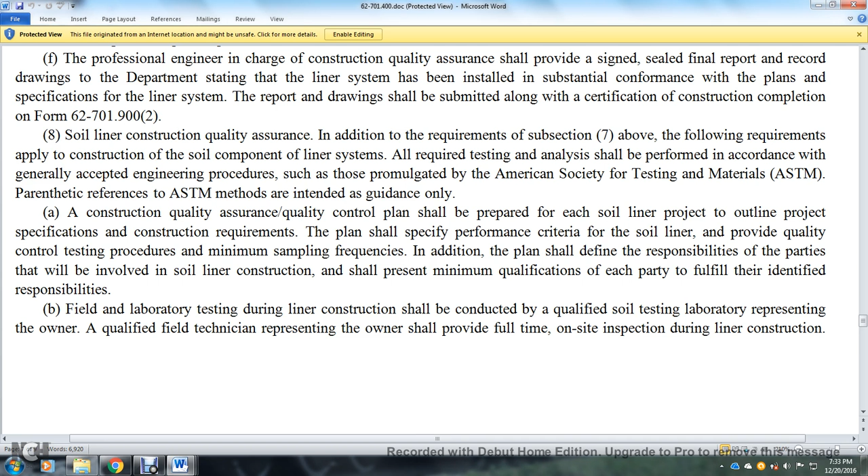Field and laboratory testing during liner construction shall be conducted by a qualified soil testing laboratory representing the owner. A qualified field technician representing the owner shall provide full-time on-site inspection during the liner construction. The field technician shall work under the supervision of a professional engineer with experience in soil liner construction.

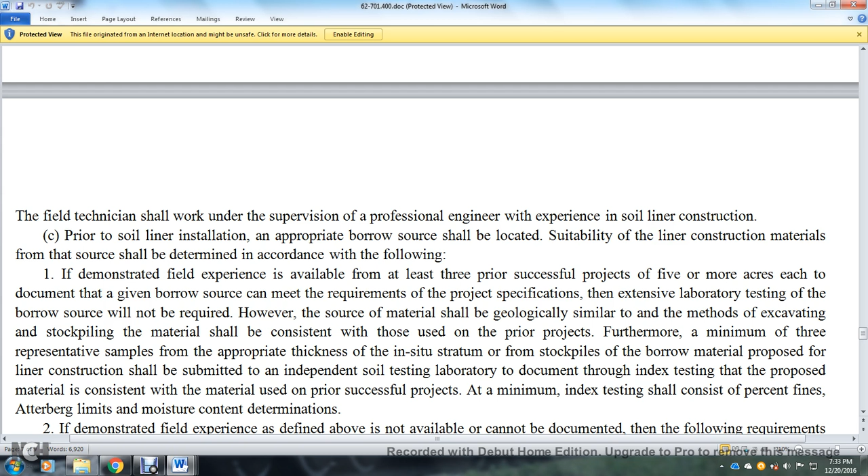Prior to the soil liner installation, an appropriate borrow source shall be located. Suitable liner construction materials from that source shall be determined in accordance with the following. If demonstrated field experience is available from at least three prior successful projects of five or more acres, with documentation that the borrow source can meet

the requirements of the project specification, then extensive laboratory testing of the borrow source will not be required. However, the source of the material shall be geologically similar, and the methods of excavating and stockpiling the material shall be consistent with those used in the prior project.

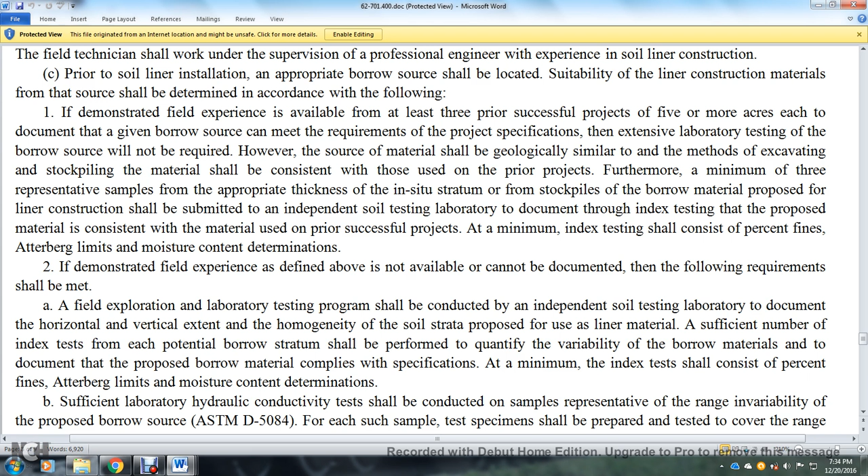Furthermore, a minimum of three representative samples from the appropriate thickness of the in-situ stratum or from the stockpile of the borrow material proposed for liner construction shall be submitted to an independent soil testing laboratory to document through index testing that the proposed material is consistent with the material used for the prior successful project. The minimum index testing shall consist of percent fines, Atterberg limits and moisture content determinations.

If demonstrated field experience as defined above is not available or cannot be documented, the following requirements shall be met. A field exploration and laboratory testing program shall be conducted by an independent soil testing laboratory to document the horizontal and vertical extent and the homogeneity of the soil strata proposed for use as liner material.

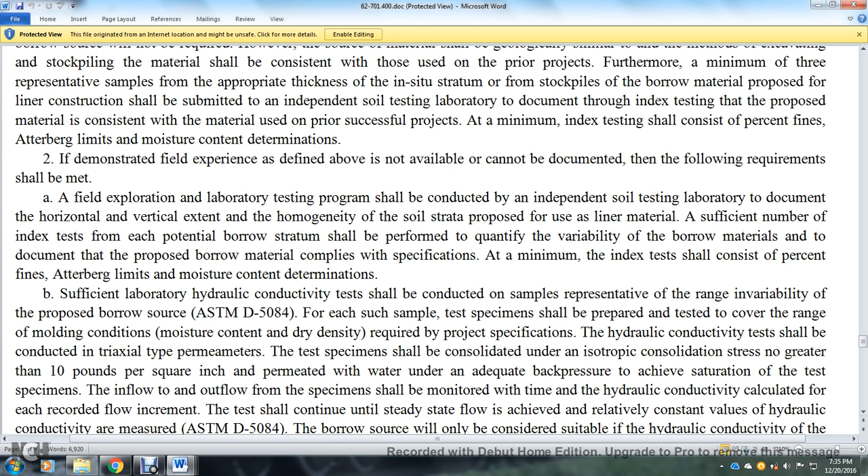A sufficient number of index tests on each potential borrow stratum shall be performed to quantify the variability of the borrow materials and to document that the proposed material complies with the specification. The minimum index testing shall consist of percent fines, Atterberg limits and moisture content determinations.

Sufficient laboratory hydraulic conductivity tests shall be conducted on samples representing the range and variability of the proposed borrow source, per ASTM D5084. For each sample, test specimens shall be prepared and tested to cover the range of molding conditions, moisture content and dry density required by the project specification. The hydraulic conductivity tests shall be conducted with the triaxial type permeameter.

The test specimen shall be consolidated under an isotropic consolidation stress no greater than 10 pounds per square inch and permeated with water under adequate back pressure to achieve saturation of the test specimen. Inflow and outflow through the specimen shall be monitored with time, and the hydraulic conductivity calculated for each recorded flow increment. This shall continue until steady state flow is achieved and relatively constant values of hydraulic conductivity are measured, per ASTM D5084.

The borrow source will only be considered suitable if the hydraulic conductivity of the material, as determined by the laboratory test specimens, can be shown to meet the requirements of the project specification at a 98% confidence level.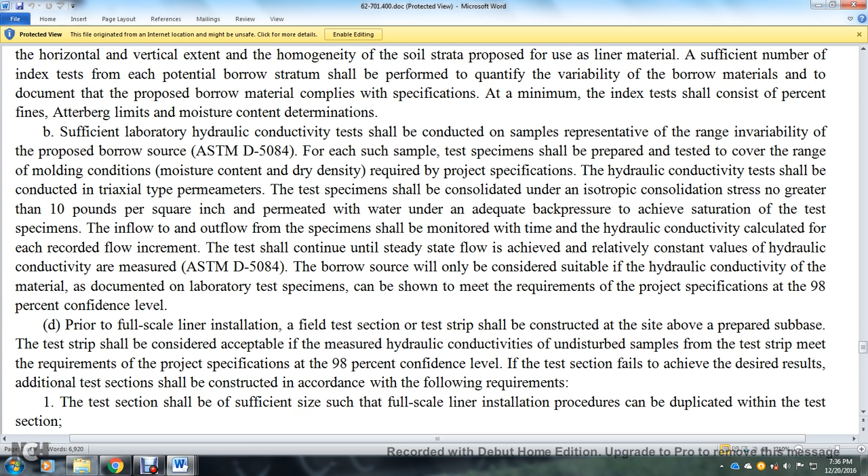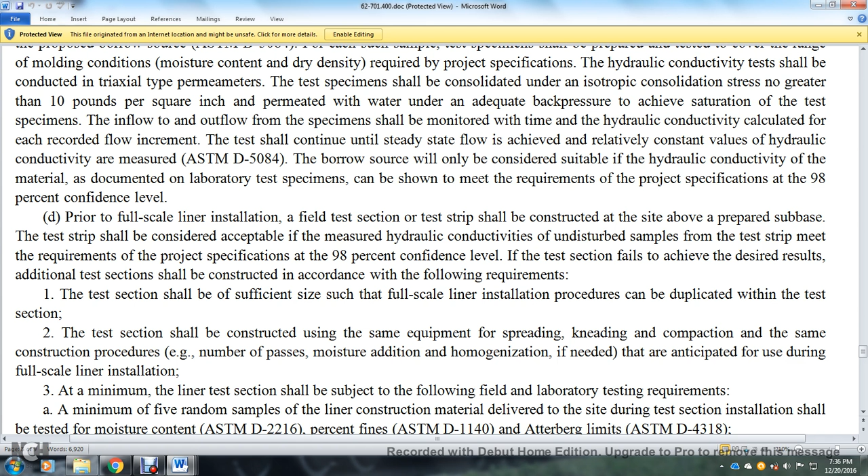Prior to the full-scale liner installation, a field test section or test strip shall be constructed at the site above the prepared subbase. The test strip shall be constructed and the hydraulic conductivity measured on undisturbed samples. The test strip must meet the requirements of the project specification at a 98% confidence level. If the test section fails to achieve the desired results, additional test sections should be constructed in accordance with the following requirements.

The test section shall be of sufficient size such that the full-scale liner installation procedures can be duplicated within the test section. The test section shall be constructed using the same equipment for spreading, kneading, and compacting, and the same construction procedures, such as the number of passes, moisture addition and homogenization if needed, that are anticipated for use during the full-scale liner installation.

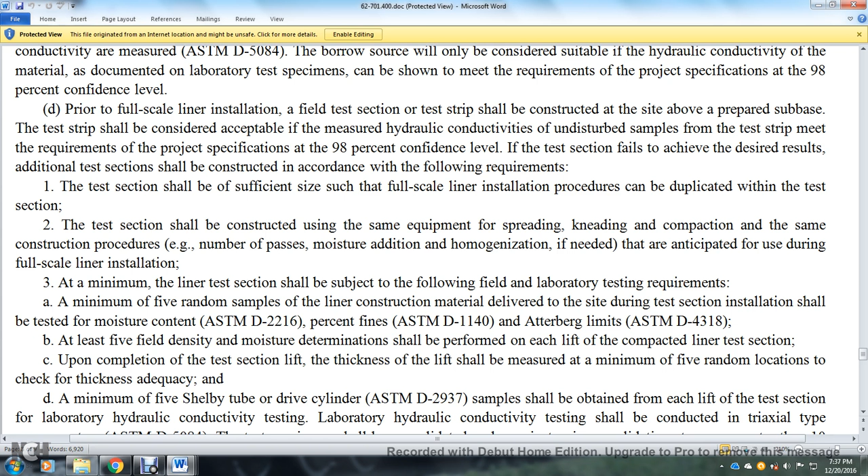The completed liner test section shall be subject to the following field and laboratory testing requirements. A minimum of five random samples of liner construction material delivered to the site during test section installation shall be tested for moisture content ASTM D2216, percent fines ASTM D1140, and Atterberg limits ASTM D4318. At least five field density and moisture determinations shall be performed on each lift of the compacted liner test section.

Upon completion of the test section, the thickness of the lift shall be measured at a minimum of five random locations to check for thickness adequacy. A minimum of five Shelby tube or drive cylinder ASTM D2937 samples shall be obtained from each lift of the test section.

For laboratory hydraulic conductivity testing, laboratory hydraulic conductivity tests shall be conducted with the triaxial type permeameter, ASTM D5084. The test specimen should be consolidated under an isotropic consolidation stress no greater than 10 pounds per square inch, and permeated with water under adequate back pressure to achieve saturation of the test specimen.

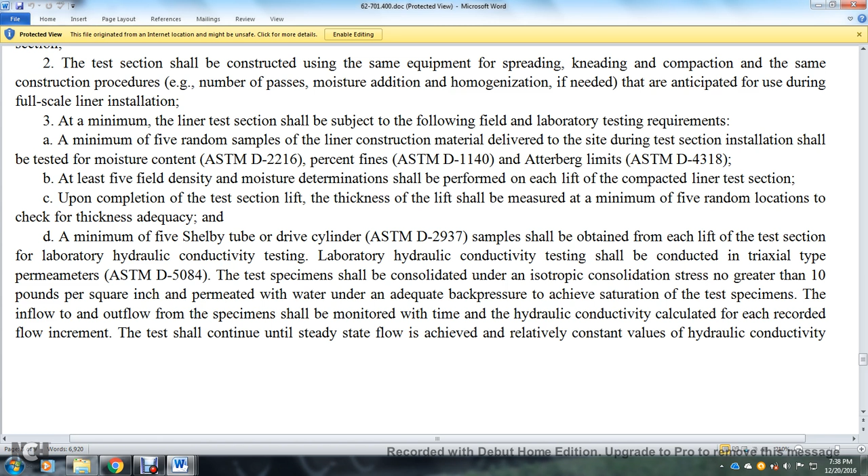The inflow and outflow from the specimen shall be monitored for the time, and the hydraulic conductivity calculated for each of the recorded flow increments. The test shall continue until a steady state flow is achieved, with relatively constant values of the hydraulic conductivity measured, per ASTM D5084.

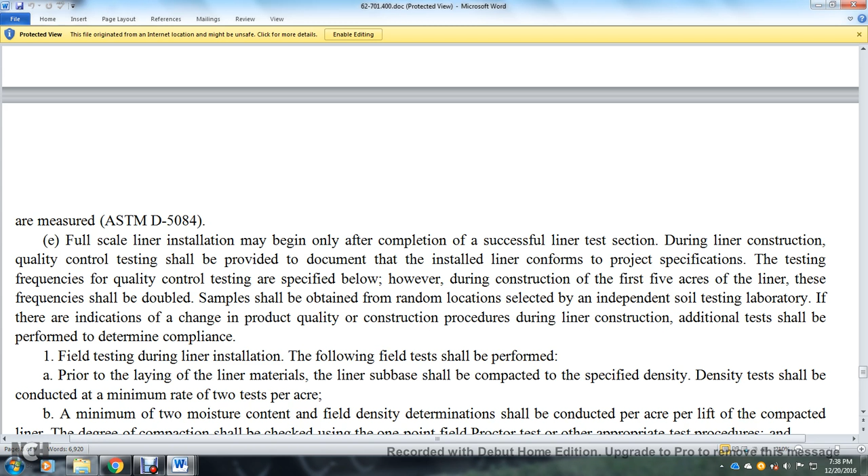Samples should be obtained from random locations selected by the independent soil testing laboratory. If there are indications of a change in product quality or construction procedures during the liner construction, additional testing shall be performed to determine compliance.

Field testing during the liner installation: the following field tests shall be performed prior to laying of the liner material. The liner base and sub-base shall be compacted to the specified density.

Density tests shall be conducted at a minimum rate of 2 tests per acre. A minimum of 2 moisture content field density determinations shall be conducted per acre per lift of the compacted liner. The degree of compaction shall be checked using the 1-point field Proctor test.

Other appropriate test procedures: a minimum of four thickness measurements shall be conducted per acre per lift of the compacted liner.

Laboratory testing during liner installation: the following laboratory tests shall be performed. Percent fines per ASTM D1140 for the liner construction material shall be determined, with a minimum frequency of 2 tests per acre per lift of the installed liner.

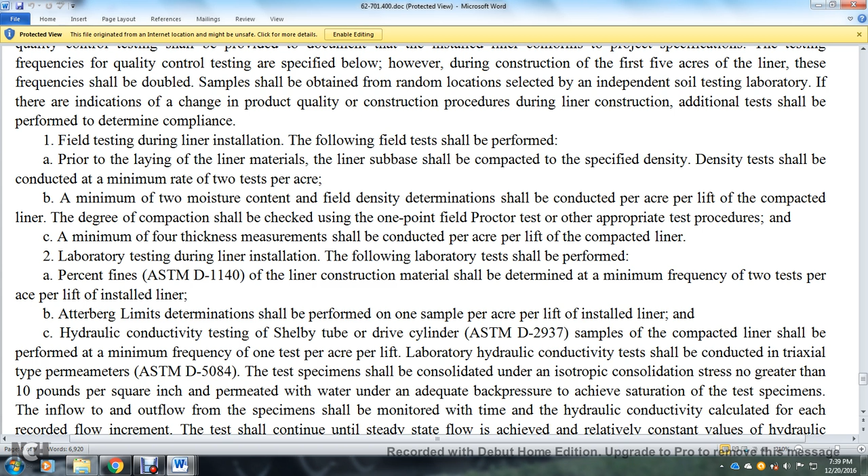Atterberg limits determination shall be performed, at a rate of 1 sample per acre per lift of the installed liner.

Hydraulic conductivity tests shall be done with a drive cylinder per ASTM D2937. The sample of the compacted liner shall be tested at a minimum frequency of 1 test per acre per lift.

Laboratory hydraulic conductivity tests shall be conducted using the triaxial type permeameters per ASTM D5084. Test specimens shall be consolidated under isotropic conditions, with stress not greater than 10 pounds per square inch, and permeated with water under adequate back pressure to achieve saturation of the test specimens.

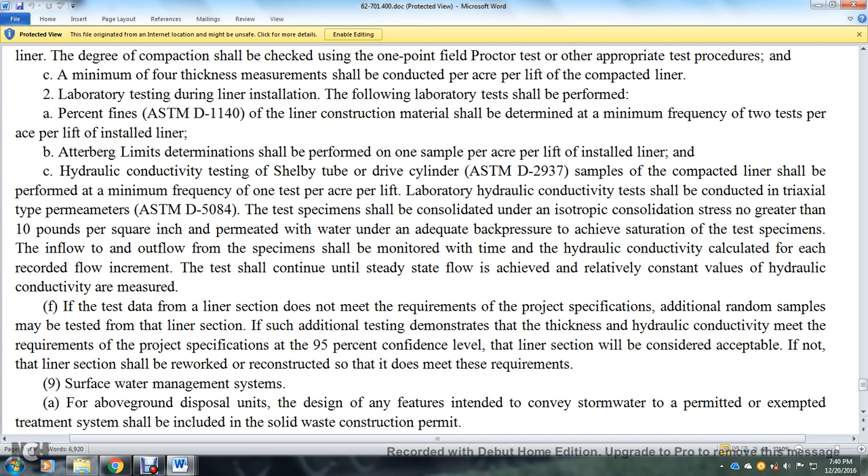The inflow and outflow from the specimens shall be monitored over time, with the hydraulic conductivity calculated for each recorded flow increment. The test shall continue until a steady state of flow is achieved, with a relatively constant value of hydraulic conductivity measured.

If the test data for the liner section does not meet the requirements of the project specification, additional random samples may be tested from the liner section. Such additional testing must demonstrate the thickness and hydraulic conductivity meet the requirements of the project specification at a 95% confidence level for the liner section to be considered acceptable.

If the liner section does not meet the requirements, it should be reworked or reconstructed for the surface water management system. For above ground disposal, the unit design for any feature intended to convey stormwater to a permitted or exempted treatment system shall be included in the solid waste construction permit.

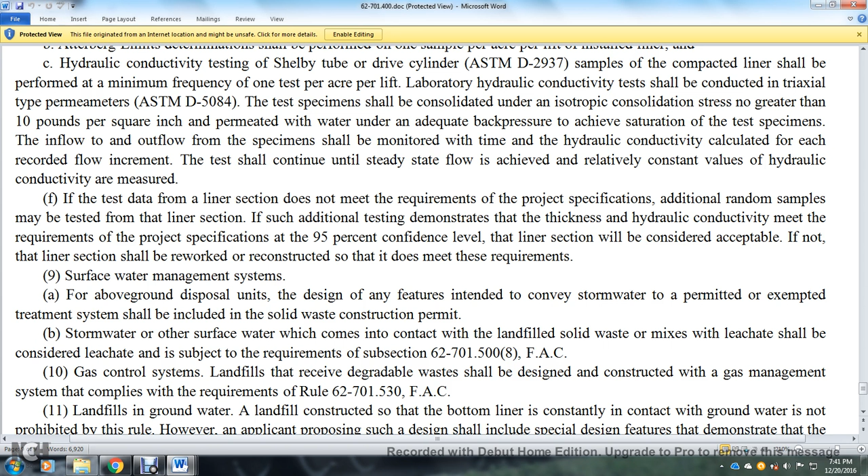The stormwater or other surface water which comes in contact with the landfill solid waste or mixes with leachate shall be considered leachate and subject to the requirements of subsection 62-701.500(8).

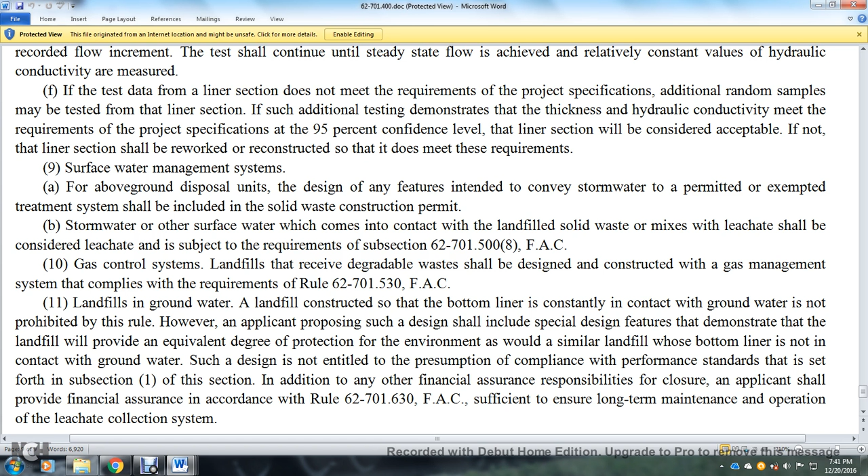Gas control system: landfills receiving degradable waste shall be designed and constructed with a gas management system that complies with the requirements of Rule 62-701.530, Florida Administrative Code.

Landfills constructed so that the bottom of the liner is constantly in contact with the groundwater are not prohibited by this rule. However, an applicant proposing such a design shall include special design features to demonstrate the landfill is provided with an equivalent degree of environmental protection as would a similar landfill whose bottom liner is not in contact with the groundwater.

Such a design is not entitled to the presumption of compliance with the performance standards set forth in subsection 1 of this section. In addition to any other financial assurance responsibilities for closure, an applicant shall provide financial assurance in accordance with Rule 62-701.630, sufficient to ensure long-term maintenance and operation of the leachate collection system.

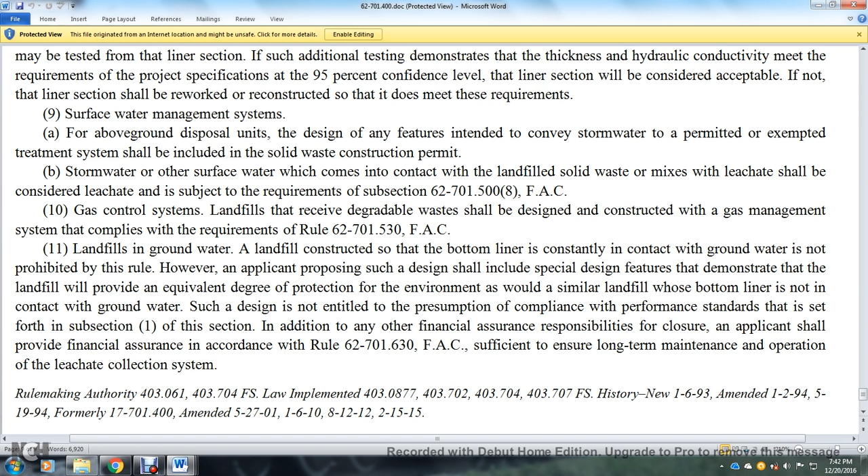Rulemaking Authority 403.061, 403.704, Florida Statutes. Law implemented 403.0877, 403.702, 403.704, 403.707, Florida Statutes. History: New January 6, 1993, amended January 2, 1994, May 19, 1994, formerly 17-701.400, amended May 27, 2001, January 6, 2010, August 12, 2012, and February 15, 2015.